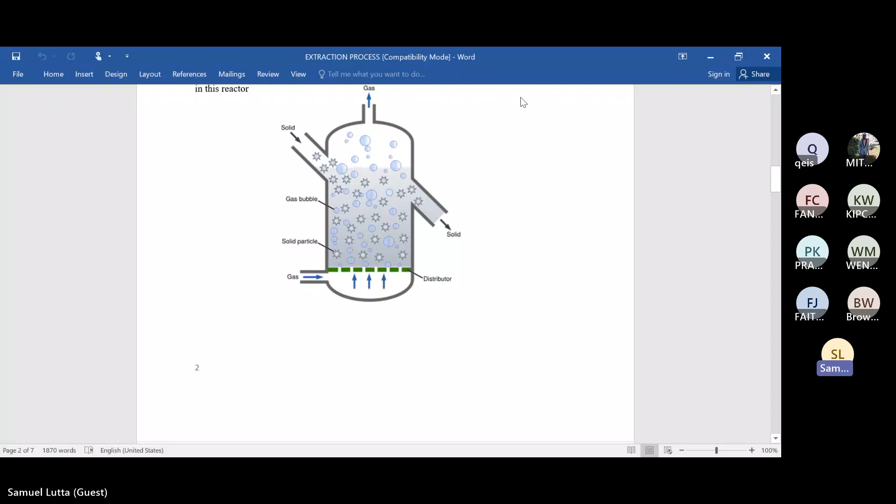Okay, let's try to see if it will share. Yeah, I think it has accepted. Sorry about that. Okay, I don't know if you can see something on the screen. Sorry, we'll try to move fast. Yes. Okay, so yeah, that's what I wanted. I think I'd joined using a wrong browser. Okay, so let's just move a bit fast. Sorry, I've wasted time, but it's okay.

So we are going to talk about extraction of metals, and this is what we refer to as metallurgy. Metallurgy is the study of the metals, their properties, and how they are extracted from their ores. We know they occur in nature, but they normally don't occur in pure form. Most of them will be gotten when they have combined with other elements.

Like if it is copper, we can talk of copper carbonate. So you need to convert the carbonate into copper oxide, and then you reduce to get copper, and so on. So extraction of metals is the process of getting these metals from their ores. There are some terms that we need to know. One of them is called calcination. I'll not read the notes word for word, but

calcination is the process of obtaining these metals by heating them in absence of air. You take the ore, heat it in absence of air, so that it can decompose and other impurities in volatile form can disappear. We normally heat them below their melting point.

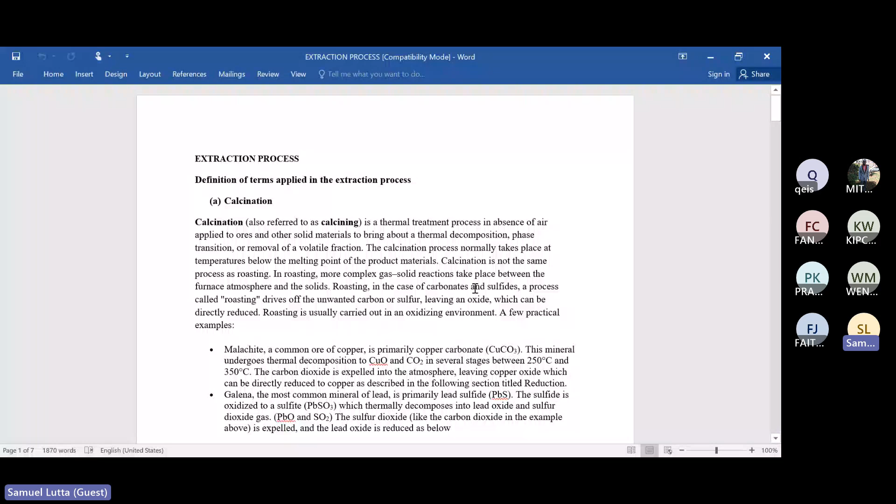Galena is lead sulfide. When you heat lead sulfide, it can be oxidized to lead oxide plus sulfur dioxide. We study these processes because they also contribute to pollution of the environment. So roasting means we heat in presence of an oxidizing agent, and in the process part of the material decomposes to give us something else.

Now, when carrying out calcination, we normally do it in what we call a furnace, which is a special chamber that can withstand very high temperatures.

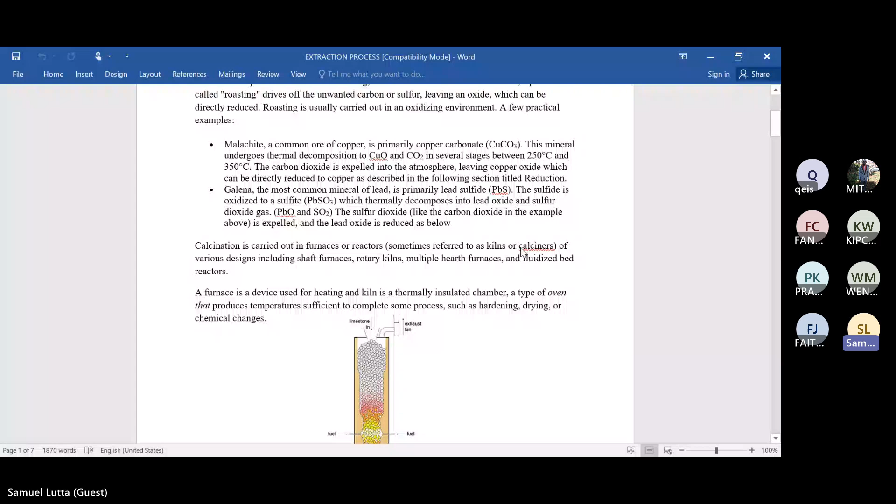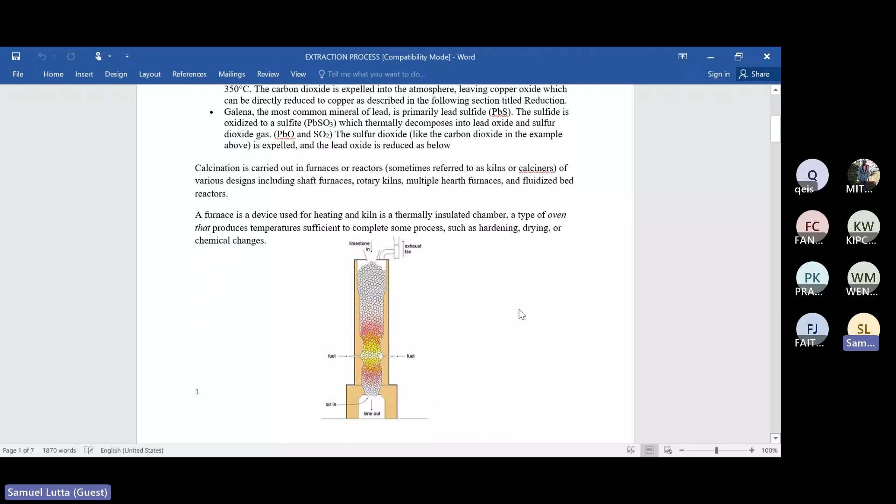So there are furnaces that can withstand high temperatures, and an example of a furnace is shown here. So this is a furnace made up of special material. They are called refractory materials, which can withstand very high temperatures.

Sorry, there's some things that keep on popping up on the screen. It is not part of the class.

So this is what we have. This is an example of a furnace. So this furnace has the top part, which is open, where we introduce the material to be roasted. And then on the side, we introduce a fuel. So fuel is introduced for heating, for producing the heat. And then we also introduce air down here.

So you can see we have a fan here. So on the side, we introduce fuel to bring about the heating, and then down here we introduce the air, which causes oxidation. And as we do that, the material will decompose. So this is an example of limestone, which is calcium carbonate.

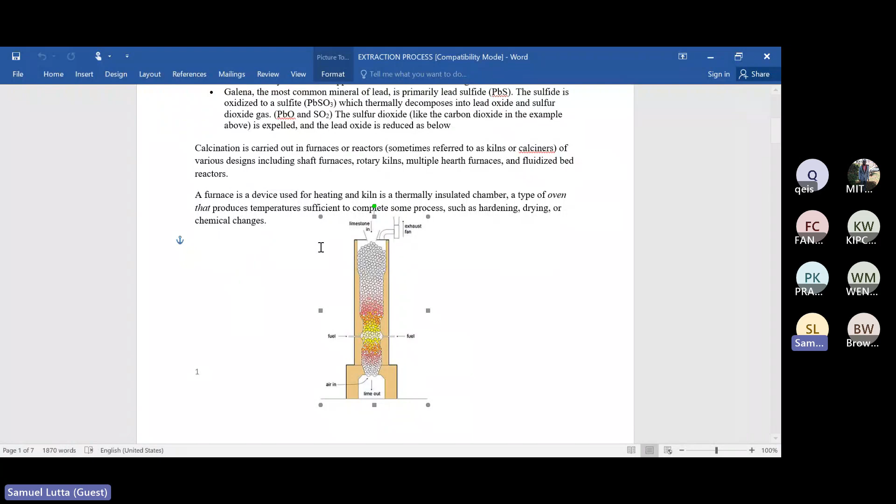So this calcium carbonate, you introduce it from up here, and then down here you introduce air, and then on the side you introduce fuel, which burns the material. So when you burn calcium carbonate, what you get is calcium oxide, which will come out down here as lime. So here they say lime out. So lime is just calcium oxide, which we got by decomposing that.

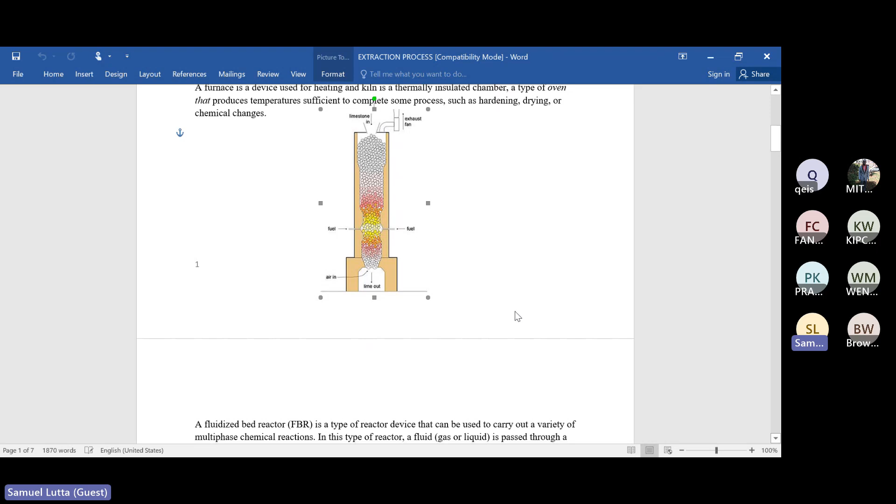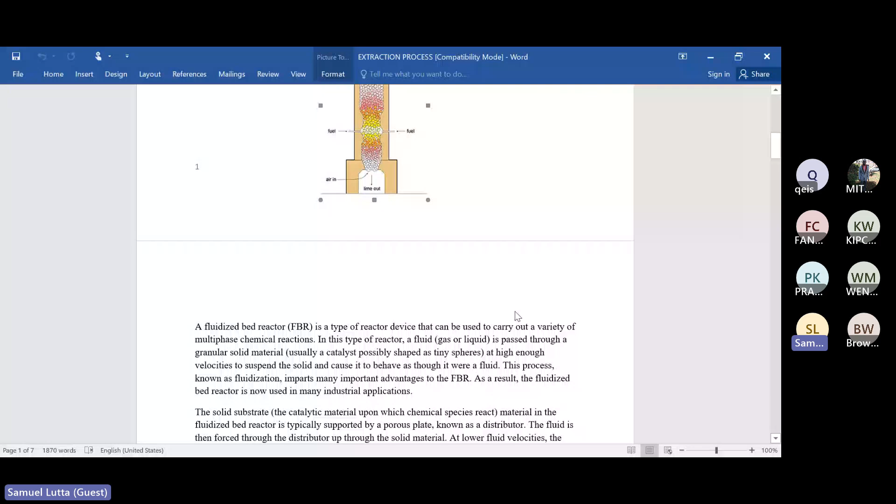So in doing this reaction, we normally use a chamber. It's called a fluidized bed reactor. So this is a device that is used for multiphase reactions. And the purpose is just to ensure that the materials being reacted mix properly. I'm not reading the notes word by word, but the main purpose is just to help in the mixing of the material. So this is what we are talking about here.

So we introduce the solid, and then down here we introduce the gas. The purpose of this gas is it brings in bubbles, and the bubbles allow the solid to separate. And in the process of separating them, you can end up getting the materials that you like. If it's material of different densities, when you bubble them up, you can get the lighter ones coming up, the heavier ones down, and then you can separate them.

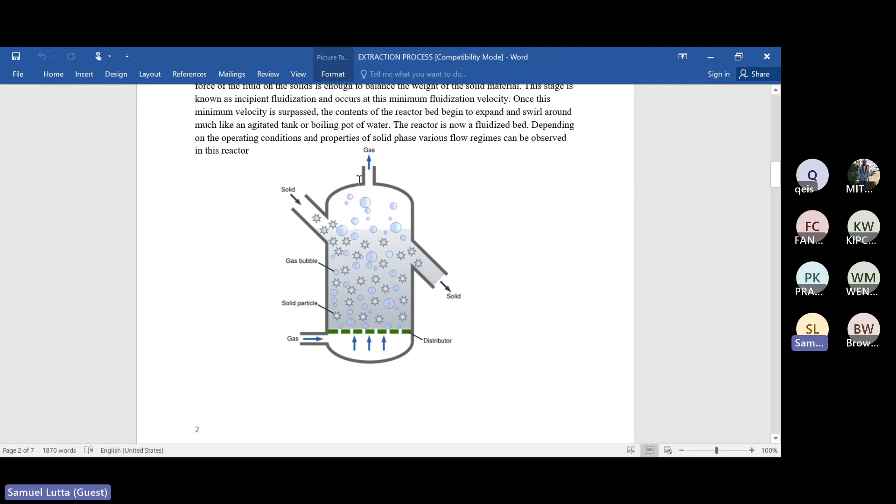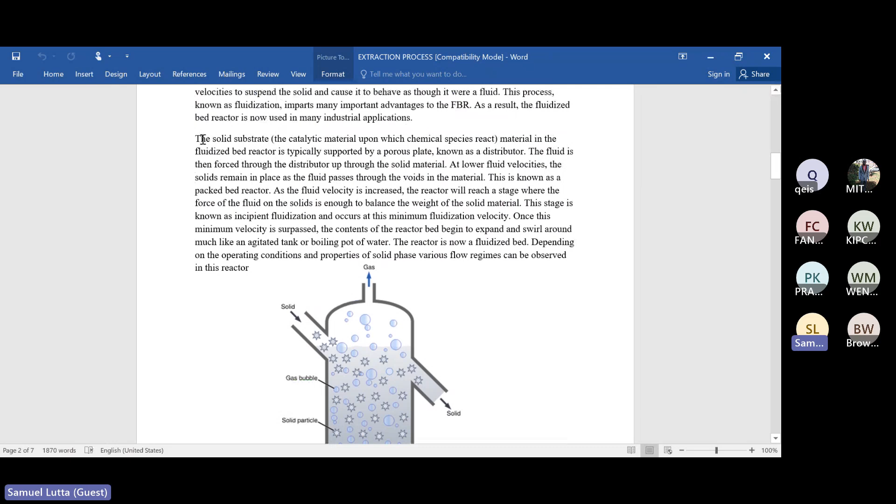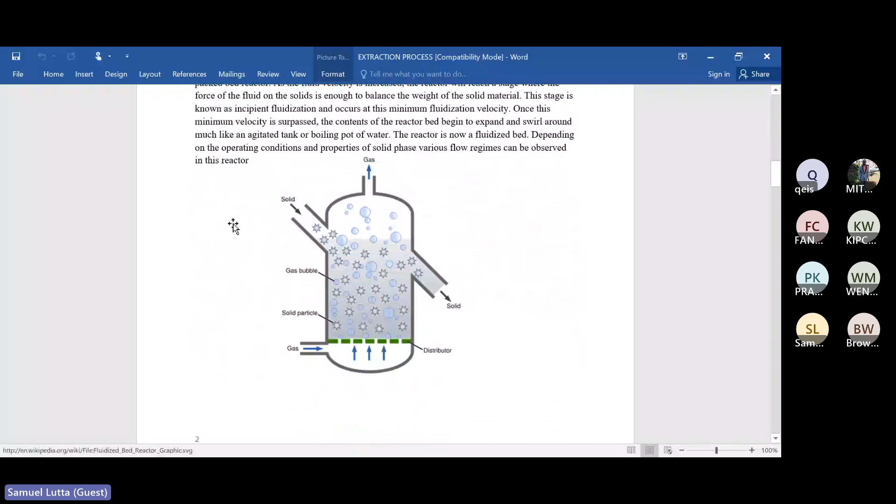So the most important part here is just to help with the separation. And it's normally used in factories, especially when we're carrying out reactions involving solids or liquids. So the process is known as fluidization. It means you try to make these materials behave as if they are fluids. They can flow. So you introduce a gas which helps in mixing, and then you can separate them.

Now, when you're doing extraction, because it's a very expensive process, the first thing is to make sure that we remove the impurities from the starting material. So you want to make sure that the ore that you are taking into the process of extraction contains as much of the wanted material as possible. You don't want to process something which is very impure, because the process will be expensive and you'll end up getting an impure product.

So the process of removing impurities from a metal ore before you do extraction is what we refer to as concentration of the ore. To concentrate the ore means you try to make sure that it has as little impurity as possible. So when we are doing this, there are processes that we follow. There's one which is referred to as hydraulic washing or gravity separation.

So in this one, the ore is poured onto a vibrating sloped table with grooves, and then a water jet is allowed to flow over. So what happens is the denser material will settle in the grooves, while the lighter ones will be washed away. I think I had a diagram to show this. Okay, maybe it's not in here.

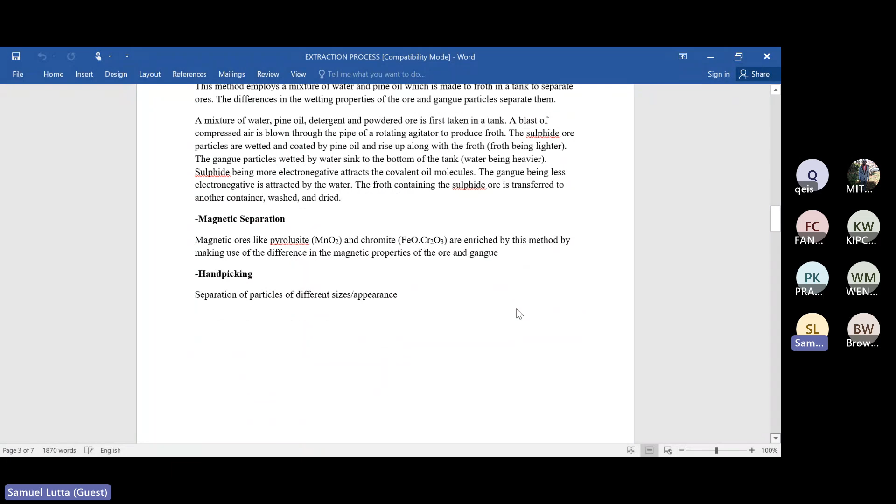So I think we were talking about hand picking. You can separate just by picking, and this separation will depend on the size of the particles of the material. And then apart from trying to concentrate, you can also do what we call smelting. I think it's almost similar to calcination. Smelting is one of the ways of producing the metal from its ore, and it normally involves metals which are fairly less reactive, like silver, iron, copper, and others.

So in smelting, we heat the material in the presence of a reducing agent. When you heat in the presence of a reducing agent, the reducing agent can drive off other elements from the ore or from the slag to form the metal. For example, when you heat lead oxide with carbon monoxide, the carbon monoxide picks the oxygen from lead oxide to form carbon dioxide, and then you get lead metal. So you heat in the presence of a reducing agent.

The reducing agents commonly used here are carbon, what we refer to as coke, and sometimes you can use carbon monoxide to bring about the same. So you can reduce using carbon or carbon monoxide, but the best is carbon, because carbon monoxide is poisonous. So it reduces, and in the process you get the metal. Smelting is just a process of reducing by heating the metal ore with a reducing agent.

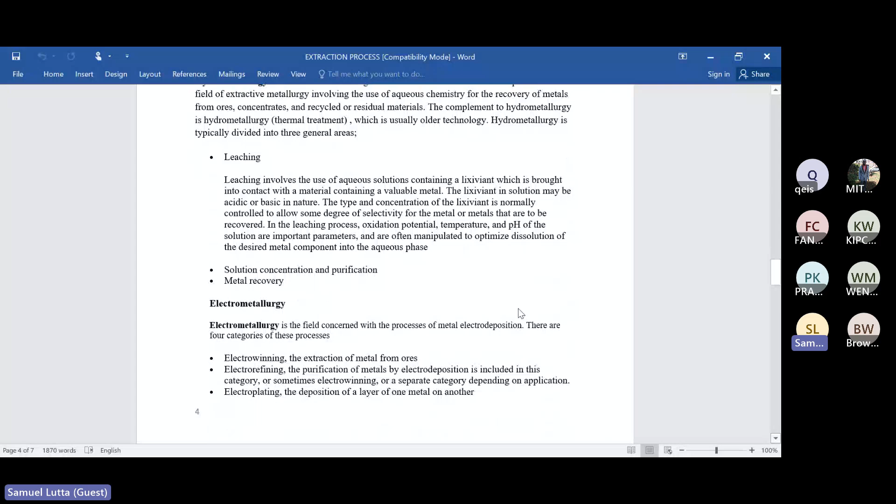Just know hydrometallurgy, we use aqueous solution to obtain metal from the ore. And then we have electrometallurgy, where we use electricity. Hydro, we use solution.

For electrometallurgy, there are terms that are used. We have electrowinning, which is just extraction of the metal from the ore by using electricity. You can also refine, what we call electrorefining. And then sometimes you can do what we call electroplating, the process of coating or depositing a metal on top of another, done for various reasons.

One reason is to beautify the metal. Another method is to protect it, by putting a layer of unreactive metal on top to prevent the inner metal from undergoing corrosion. Or sometimes it's done to reduce the cost.

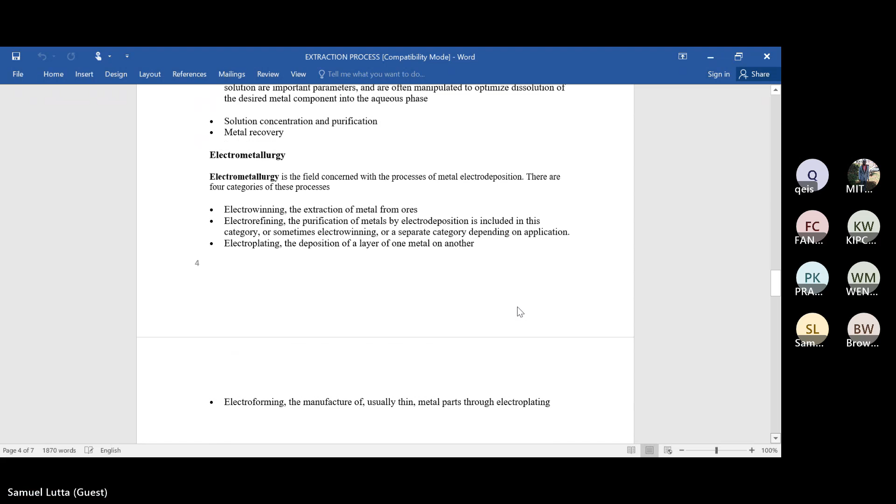I think an example is bronze. Bronze is an alloy of copper and tin, and it's mixed just to reduce the cost and for usage. And then we have got what we call electroforming, which is usually a method used to make parts of metal through electroplating.

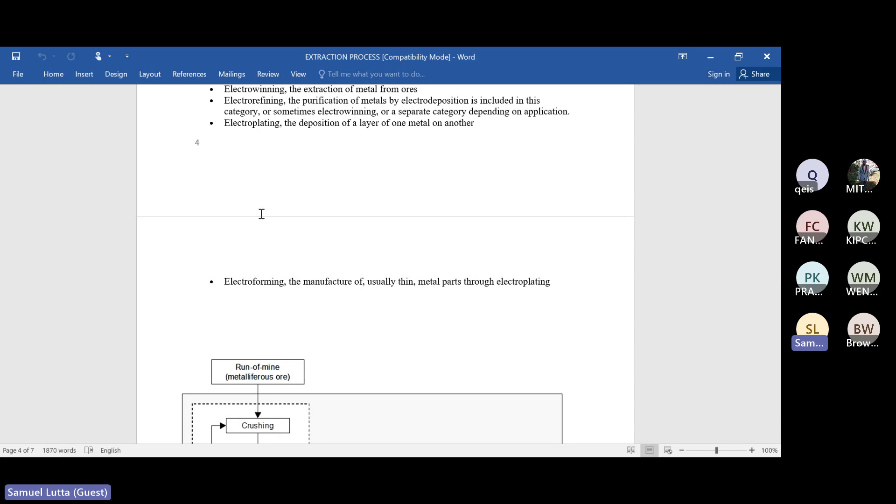Now there's a diagram here which summarizes what we are trying to say during the extraction of the metal. So we start with the ore. This ore is crushed, and then we go through a process called screening, which just filters the material according to size. So you can see here, we crush and then we screen.

If the size is not of the required measurements, it is taken back through the process until you get the one which is of the right size. Then this is followed by grinding. Grinding means you try to break them into very small particles. So you grind, check if you've gotten the right size, and if not, you repeat the process.

When you're doing the grinding, if you get the ones of the right size, you can pass them through the stages you've talked about: you can concentrate, or if you don't want to concentrate, you can bring them straight into the extraction process where the valuable element is removed from the ore. From here, you get the metal which is taken to the market, and the waste materials are either disposed of or sometimes recycled.

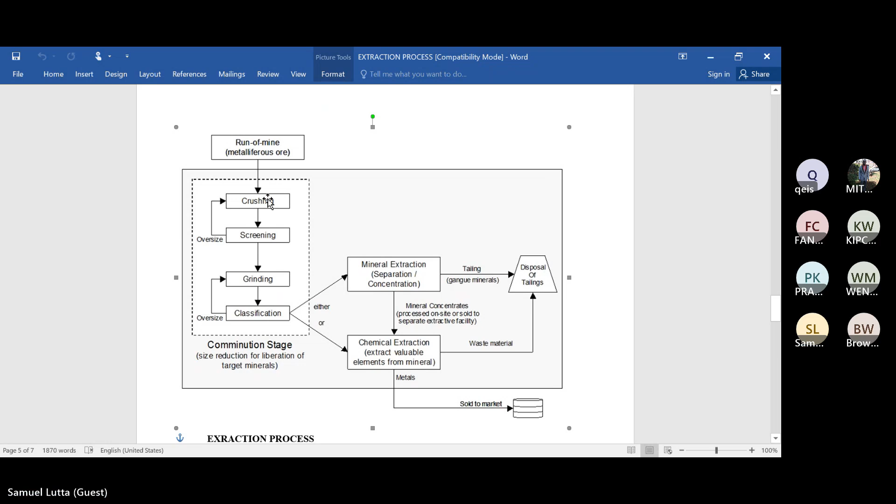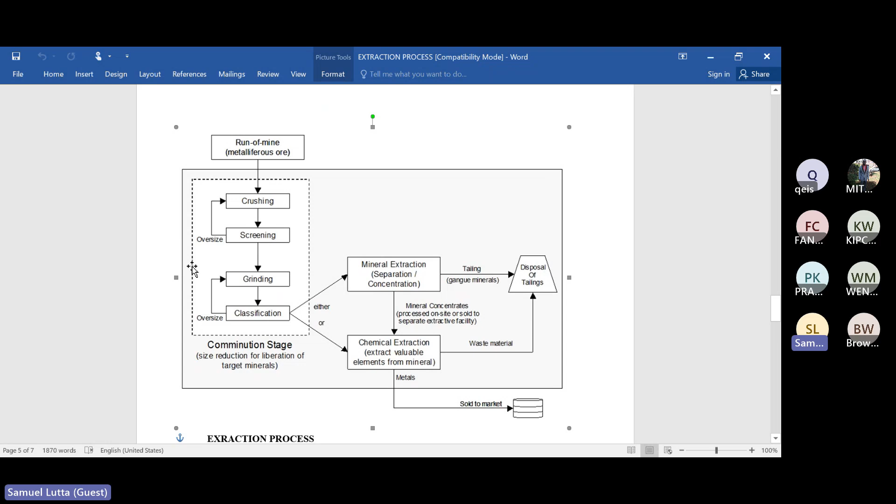So there are two ways: either you try to concentrate and bring it through this process, or after concentration, whatever is remaining - the waste - can be taken to what we call the tailings or disposal end. This diagram just shows the process. So the first stage is called the comminution stage, which has to do with getting the material to the right size. That is basically the process.

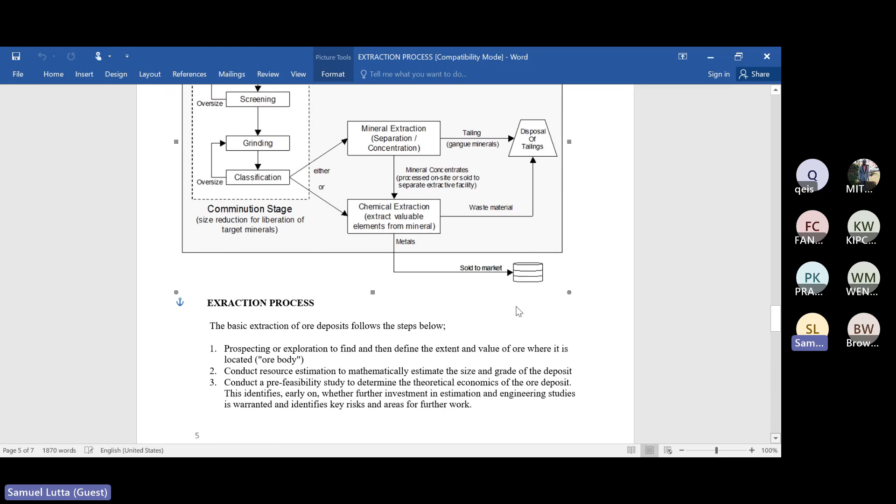So when we talk about extractions, that is the process which is followed. And there's normally a feasibility study which is done when you want to start a process, just like in any other commercial process. You have to explore, find out, and determine the extent and value of the ore and where it is located.

So sometimes you conduct this - I think it's just to tell us you look at what you want to explore or extract and compare the value and extent of the process. Normally there are people who do this, people who do economics - they do what we call operation research. They can estimate the quality of the material, the size and grade of the deposits of the ore before the whole process is carried out.

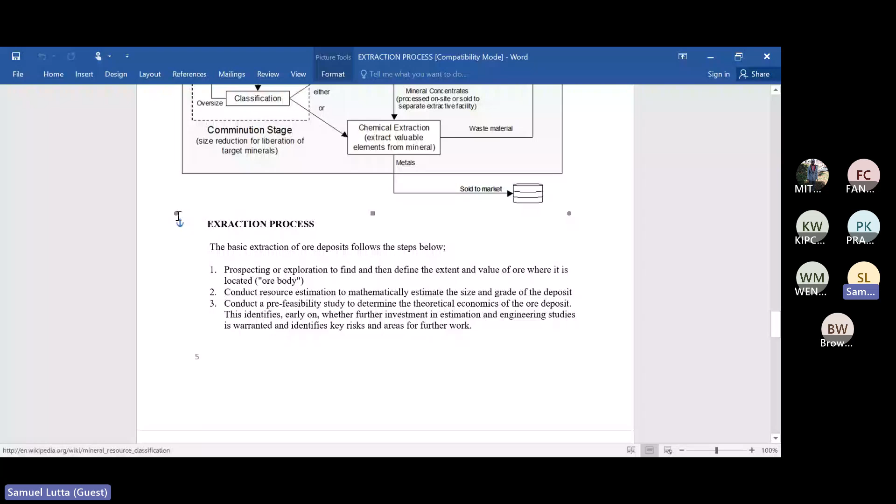Then a feasibility study is done to see how the whole process is possible. I think this is not chemistry as such, but you can conduct a feasibility study to look at the financial viability of the whole process. After that, you can develop and access the ore, and then the operation of mining can start.

We also have what we call the reclamation of the land, where mining has already been done. To reclaim means you try to cover the land so that it can be suitable for future use. Sometimes when they do mining, the place where the process has been done is normally left in a very uninhabitable state, and sometimes you might need to carry out some process to fix that.

Now there is also another process normally used when you talk about metallurgy. Instead of trying to extract the metal from its ore, you can do what we call recycling. Recycling is cheaper because you don't need to go through the whole process. What you need to do is just melt, heat the metal, clean it, heat it to melting point, and then reconstitute it. I think this is what is normally preferred as the most preferred method of obtaining these metals.

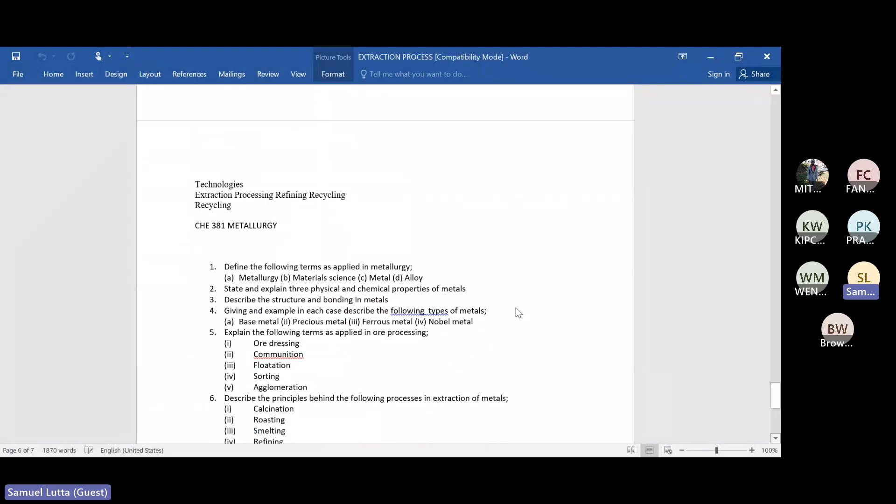So these are just the processes we've talked about. You explore, do some analysis of the ore, the resource, look at the economic aspects, look at where the deposit is, and then people sometimes do modeling, and then some exploration is done, which involves also some technology of extraction, and then the whole process is put into place. I have some exercise here which can help you answer that part on extraction.

Okay, so that just talks about the process. Now we can just look at a few metals. Let me just share this - I know we started late - so we can look at a few metals and how they are extracted.

The first one we can consider is copper - extraction of copper from the ore. Copper normally occurs as copper sulfide or copper carbonate. So the ore for copper is copper carbonate or copper sulfide, and it is extracted in different processes depending on the ore. The most common ore for copper is copper sulfide, but this does not occur as pure copper sulfide - it's actually a mixture of copper, iron, and sulfur.

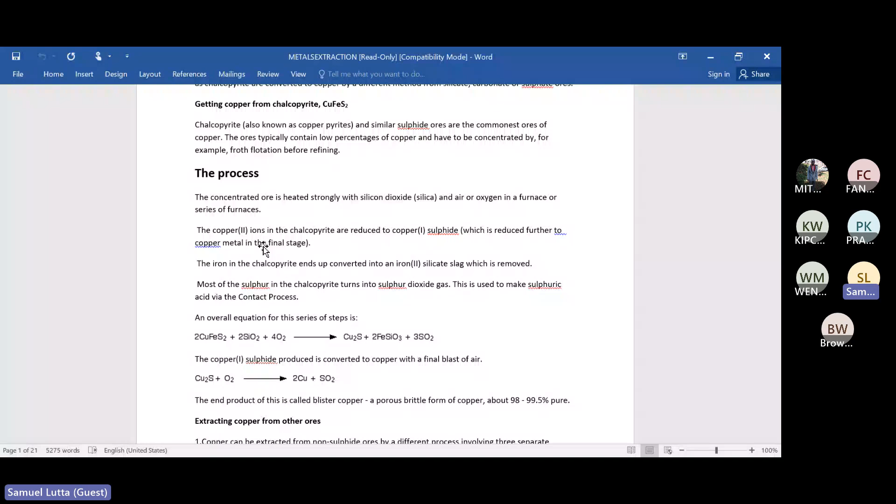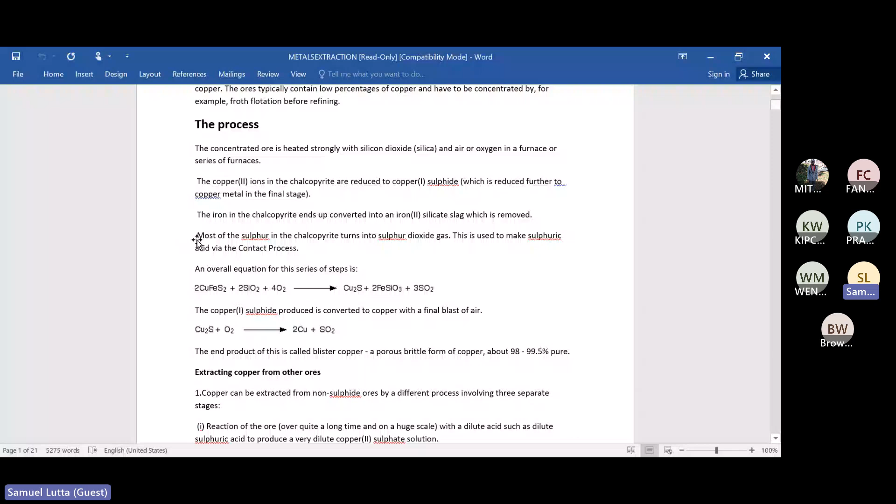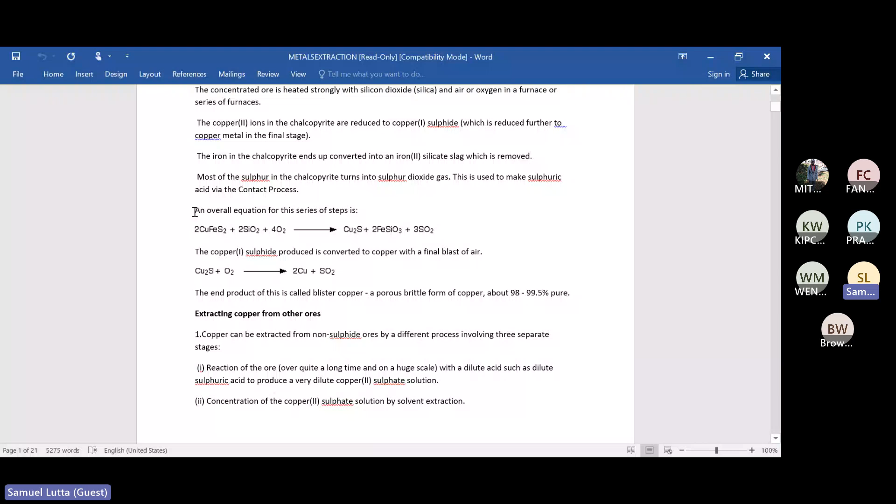So the end product here, you get copper, and this copper that you get is normally not very pure. So what we normally do is try to concentrate it. So how do we concentrate it? One way of concentrating it is we react it with dilute acid.

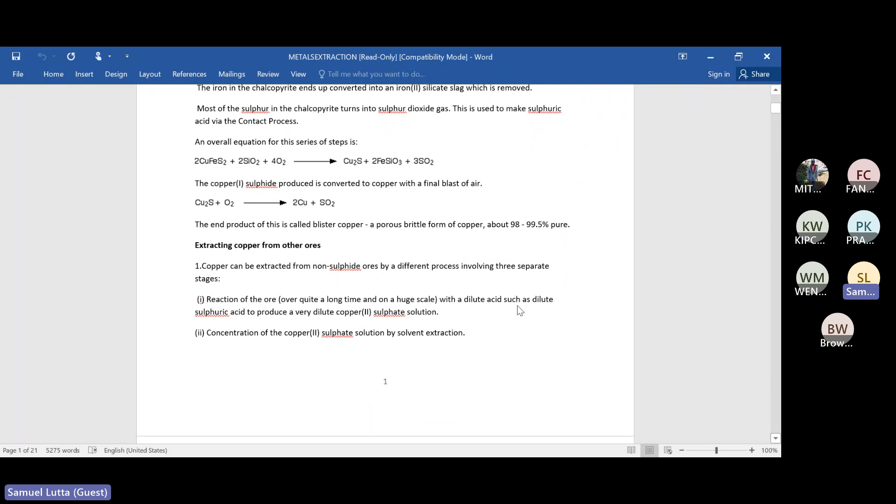This forms what we call copper sulfate, and then copper sulfate is concentrated by using either solvent extraction, organic solvent extraction, or sometimes electrolysis. I think the best is to do electrolysis. When you do electrolysis of copper using copper electrodes and the copper sulfate solution, the copper ions will be deposited at the cathode as copper metal.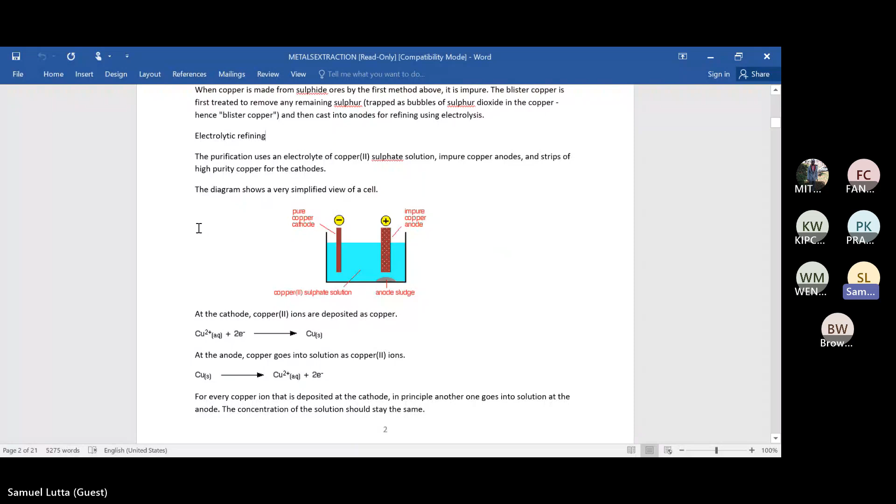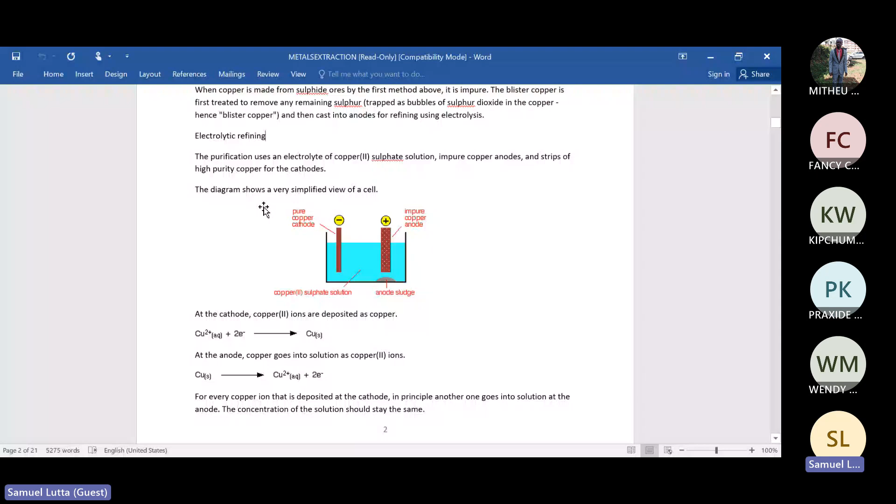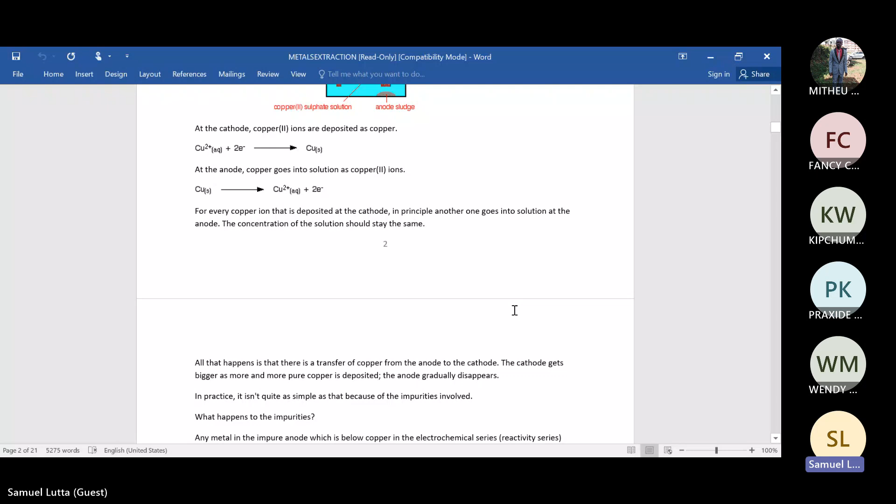So the process is shown here. This is the anode, where we have the copper ions which dissolve from the impure copper. So this is the impure copper. So the copper dissolves, and then we have some waste seen here. These are just waste from the ore. So those ones will move to a solution and get deposited as copper. So this is what happens. So the process involves purification by use of electrolysis, and then you get pure copper.

Now, during the process, we normally get some impurities. So some of these impurities are metal ions which have not reacted, and they can be used for further processing. So some of the metals that can be contained here are things like zinc, and we know that they can also be concentrated and removed.

So I think what we need to do here is to know why do we extract copper? We extract copper because it is useful. Some of the uses of copper is to make electrical wire, because it has high conductivity, and in other places it is used to make pipes, water pipes, and even sometimes gas pipes, because it does not react with water, and it's also easy to bend. It can bend easily. Boilers and also heat exchangers are made of copper because it's a good conductor of heat and it does not react with water.

So we just talked about brass as an alloy of copper and zinc. This alloy produces a metal which is harder than either of the two. And then there's another one which is bronze, made by mixing copper and tin. The purpose of alloying is to make sure that either you get a beautiful metal or you get one which is superior in terms of properties, or we do alloying to protect the metal from reacting with others.

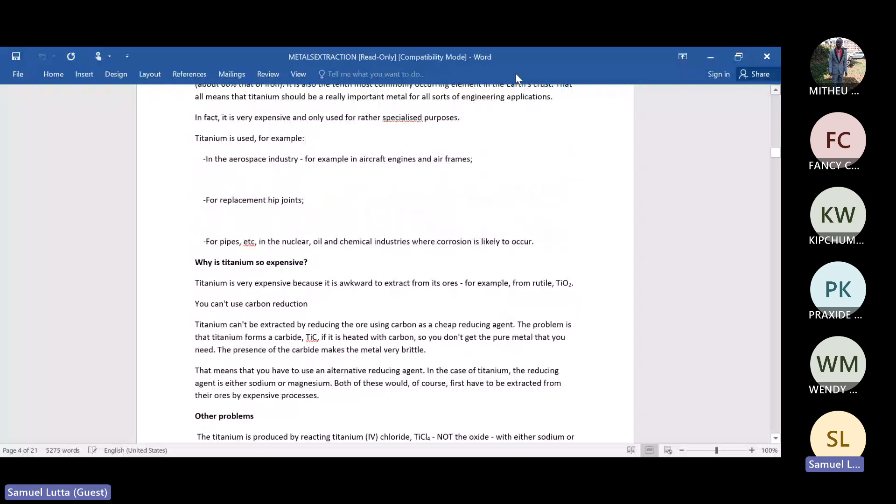So titanium is also a metal. It's also quite expensive and very resistant. It is non-reactive. So this metal is light, and because it is light, it's also used to make parts of the aeroplane. So it's actually quite expensive.

It's unreactive, and it has also been known not to react so much with the body system. And recently, it has also been used in the medical field to do what we call replacement of hips, joints, and also to do connections of the bones during fracture.

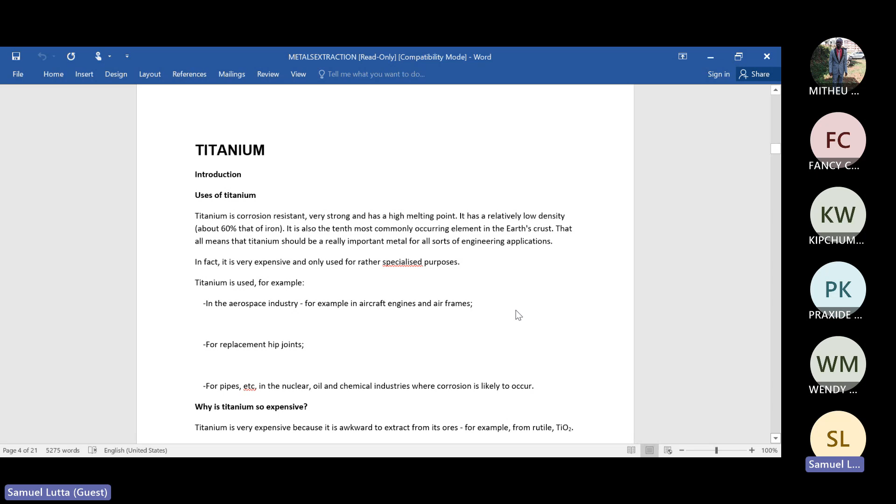So because of the lightness, it's used to make parts of airplanes. And because of its compatibility with the body system, it has found use in medical fields. It's also used to make pipes, although this is not very common because it is very expensive. So why is titanium very expensive?

It's very expensive because the oxide cannot be reduced by carbon. You cannot heat it with carbon to get titanium plus carbon dioxide. This is not possible because when you react titanium oxide and carbon, titanium will combine with carbon to form what we call titanium carbide,

because when titanium particles pack, they leave open spaces between the particles which can be occupied by carbon. So because of the formation of this carbide, it is not possible to reduce titanium oxide to form titanium. You'll get titanium carbide. So this makes the process expensive. It has to be extracted in a different way.

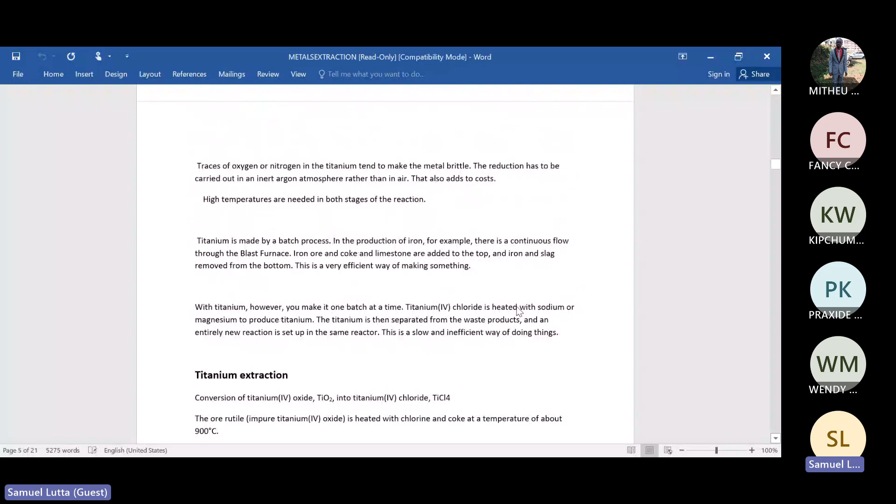So I've just said two reasons here. You can't reduce with carbon because titanium oxide will form titanium carbide. And you cannot use titanium chloride as a starting material because titanium chloride reacts violently with water. So to extract titanium, we need to use other processes and also special conditions.

So when we are doing titanium, we try to reduce it to get titanium, and to reduce it, we normally heat it with very reactive metals. We don't reduce it using carbon, but we use metals like magnesium, sodium, and so on. So the process of extraction,

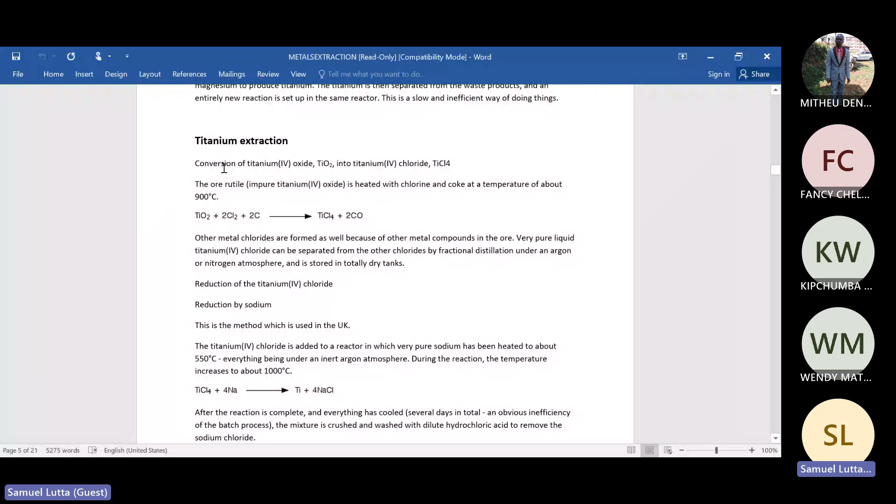for titanium oxide, we first convert it to titanium chloride under special conditions. So this is the process: the oxide is reacted with chlorine and carbon to give titanium chloride plus carbon monoxide. During this process, other chlorides will be formed because the ore contains them. Very pure titanium chloride can be separated from the other chlorides by fractional distillation.

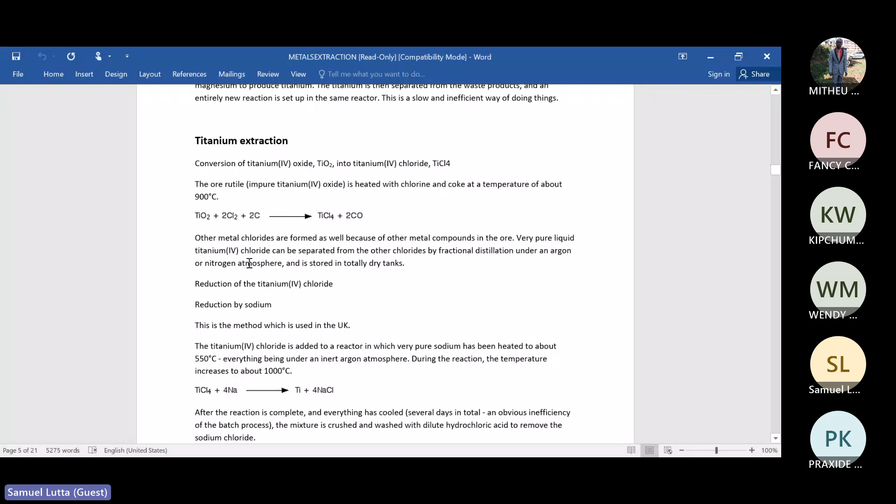Now, when reducing titanium(IV) chloride, we normally use reactive metals, and one of them is sodium. React sodium with titanium chloride, you get titanium and sodium chloride. The advantage of this reaction is that you can separate the two just by dissolving in water. Sodium chloride will dissolve in water and titanium will be deposited.

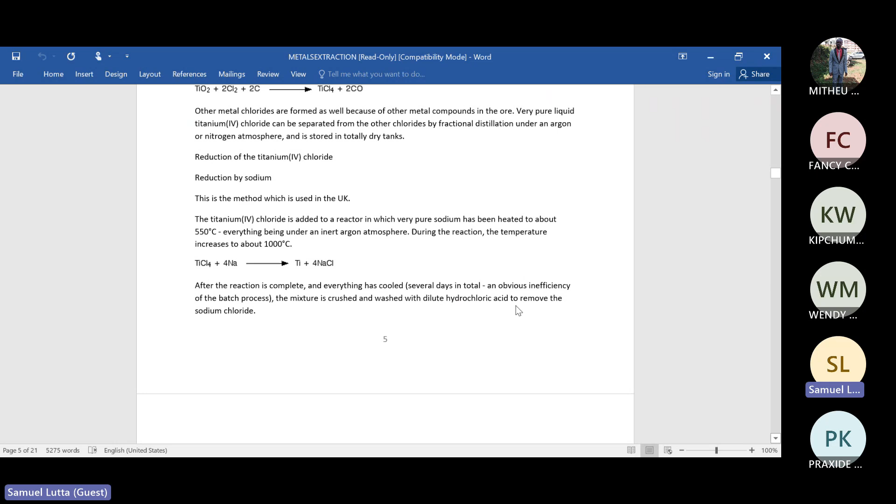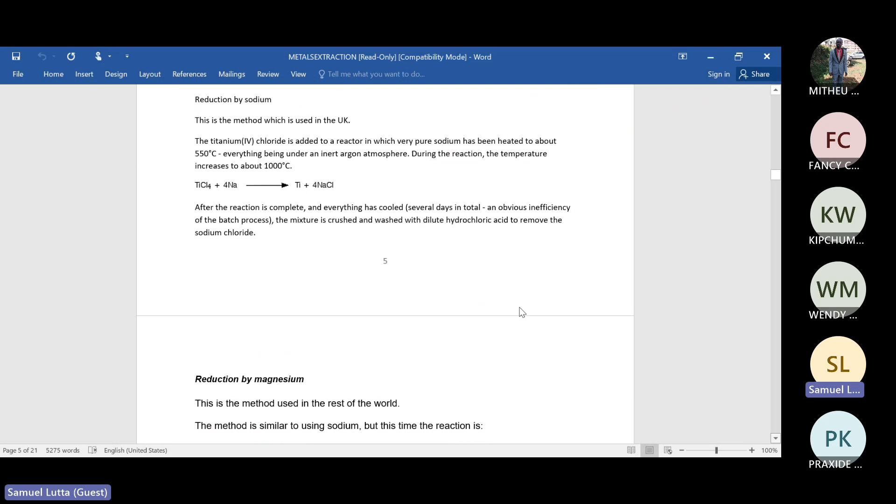Another method of reducing, once you have formed the chloride, is by reacting the titanium chloride with magnesium. So instead of using sodium, you can use magnesium, but this is normally carried out at a slightly higher temperature because sodium is more reactive than magnesium.